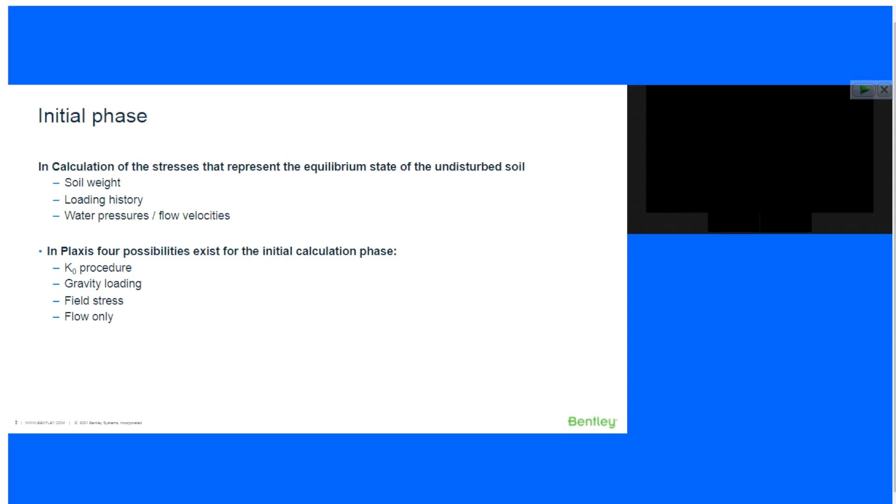I will begin to discuss how the K0 procedure works. So a K0 procedure is a direct calculation of the stresses from the coefficient of lateral earth pressure, also referred to as K0. So the way this works is in the material definitions, we'll need to define an OCR, or pre-consolidation pressure. POP is just an acronym for pre-consolidation pressure.

So what will happen is the program will automatically calculate the vertical total stress based on the unit weight of the soil, which we've defined in the material properties. It'll find the effective stress by subtracting the pore water pressure. From the effective stress, we can find the horizontal stress by multiplying by the K0 value.

PLAXIS by default uses what's called the Jaky equation, which would relate the coefficient of lateral earth pressure in the normally consolidated state equal to 1 minus sine of the friction angle. If the soil is over-consolidated, then the OCR has an effect on the K0 value, and the K0 value will increase as a function of OCR. Then based on that K0 value multiplied by the vertical effective stress, we can get the horizontal effective stress.

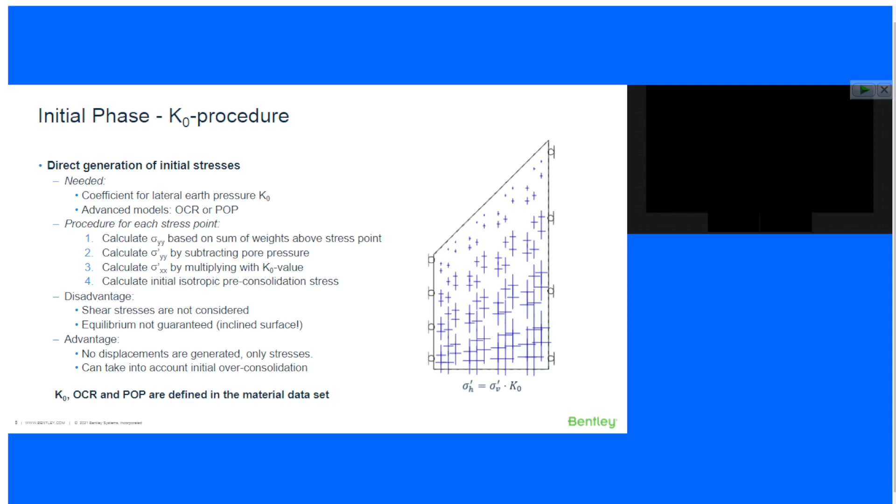So the next option to generate initial stresses is called gravity loading. Gravity loading is a different calculation procedure than K0 loading. How gravity loading works is it makes a direct calculation depending on the unit weight of the soil and the Poisson's ratio of the soil, and develops an initial stress state based on those two factors. So PLAXIS will use the unit weight of the soil and the orientation of the elements generated and generate a stress field based on that.

However, because it's based on the Poisson's ratio and not the OCR or the K0 determined from OCR, the K0 in this case is a function of the Poisson's ratio, specifically Poisson's divided by 1 minus Poisson's. So we'll get a stress field. However, that stress field will be independent of OCR. And because it's independent of OCR, this gravity loading can only really work if we have normally consolidated soil.

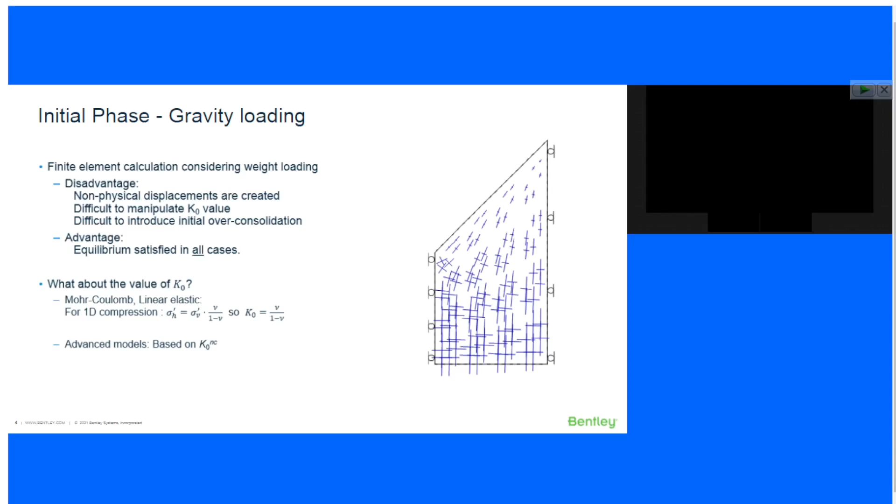Discussing gravity loading further, we need to select the ignore undrained behavior to avoid generation of unrealistic excess pore pressures when we define the gravity loading. And then the program will automatically reset displacements to 0 in phase 1 to discard all the displacements caused by the initial shear stress generation.

So as I mentioned earlier, because the program is making a direct calculation that mobilizes shear stress, it will generate shear strains. And then we need to reset those to 0 when we begin our analysis. So we need to select the option to reset displacements to 0 in the following phase. By default, this is automatically done, so you don't need to do it deliberately.

Gravity loading can take into account steady-state groundwater flow or steady-state thermal flow, and it can include the effect of suction. How suction works is that when you have a soil that has a water content greater than 0 but less than 1, you'll develop capillary stresses in the soil due to the suction effect. And the suction effect would be shown as an effective stress inside the soil. We can activate or deactivate that in the calculation control parameters window.

One final note is that if you're using gravity loading and you have an advanced model that takes into account creep behavior, because creep behavior is a time-dependent behavior, we need to define a time interval, because by default, if you're using a soil such as soft soil creep, everything is normalized to 1 day. So if we would want to have an initial stress state that captures the creep state after 1,000 days, we would need to, in the initial gravity loading phase, set t equal to 1,000 days.

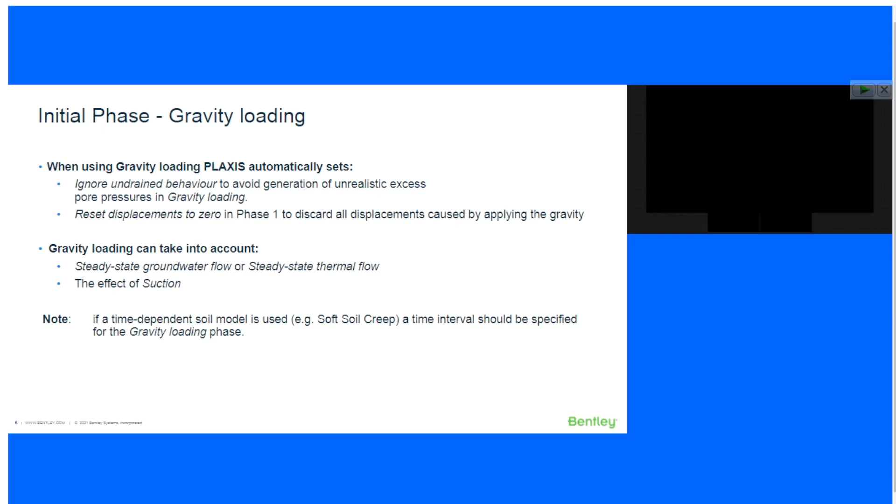The third option we have to define the initial stress state is called field stress. In the previous two options, K0 and gravity loading, the program does an internal calculation to determine the initial stress state. However, with field stress, the difference is that you are fully controlling the initial stress generation in the model. We simply tell the program that in the initial stress state we want each principal direction to have a certain magnitude of stress, and this will be applied all over your model.

So we fix the values, the magnitudes of the principal stress directions, sigma 1, sigma 2, and sigma 3, and they'll be applied over the entire model. No gravity is taken into account, so you're explicitly defining the initial stress state. You're not using the soil weight to determine an initial stress state.

We would typically use this in deep models such as tunnels where it's unrealistic to define the whole profile view of the model. Instead, we would only look at a small section and then apply a field stress that equals what we would expect for the stress state on the tunnel liner.

Again, because we are explicitly defining the magnitude of the initial stress state in the principal directions, we don't necessarily have equilibrium involved. So if your summation of forces in each of the principal directions does not equal 0, it's feasible that, depending on the boundary conditions, you would not have equilibrium guaranteed. In that case, you'll get some kind of error or some result showing that you're not reaching convergence. For the field stress option to work, all your boundaries must be fully fixed.

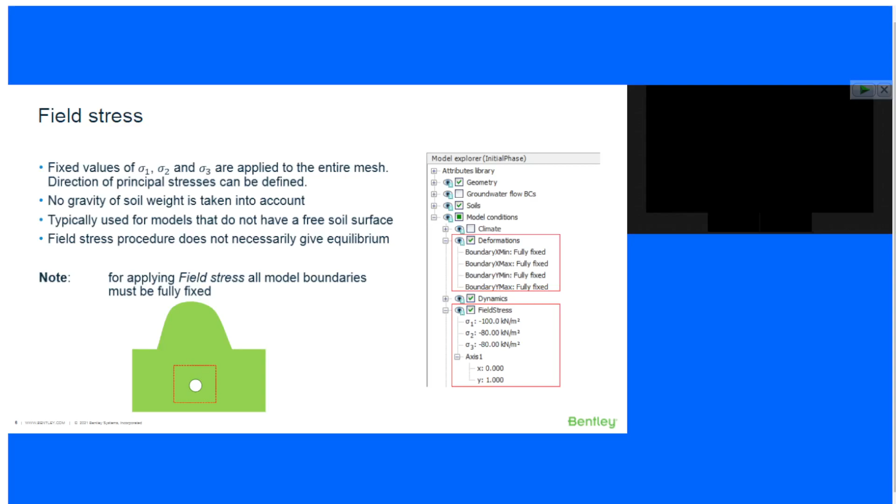So the obvious question now: for most models, we'll be using either the K0 procedure or the gravity loading procedure. Which do you use if you have soils with some level of overconsolidation, so OCR greater than 1, and you have initial shear stresses generated? Shear stresses can be generated from non-horizontal soil layers or from slopes in the surface.

So we have a solution for this. We would define the initial stresses using 2 phases. We would use the K0 procedure, and after that initial phase where we've defined K0 as the calculation type, we would have a following phase defined as plastic loading. We wouldn't make any changes to the geometry, and we would let PLAXIS calculate the shear stresses from the plastic nil step.

So we would have an initial phase with the K0 procedure defined as the calculation. We would define a new phase, phase 1, as a plastic calculation, but no changes would be made in the model. Hence, this is why it's called a nil step or null step. PLAXIS will detect the lack of equilibrium resulting from the K0 procedure and then solve it. This means it will generate the shear stresses inherent in the model.

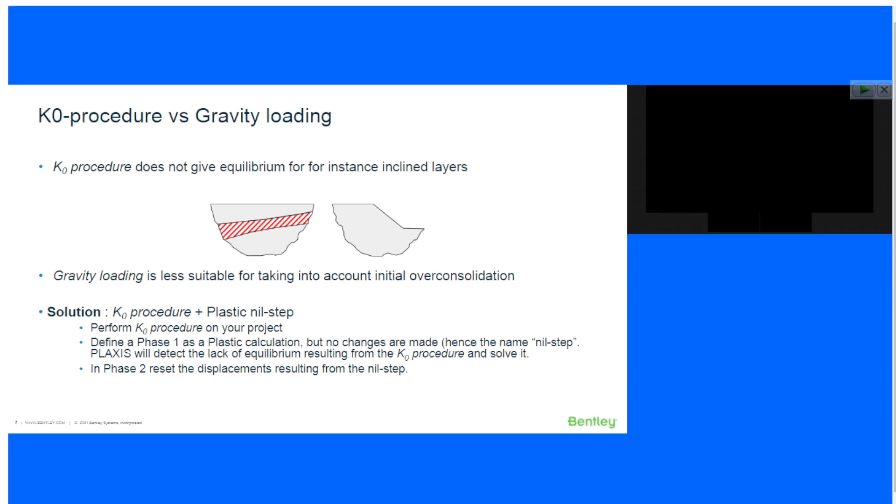And then in the following phase 2, we'll reset the displacements to 0, and then we'll begin to run our analysis. This will generate the correct initial stresses. I have a handy illustration that captures this concept in the following slide.

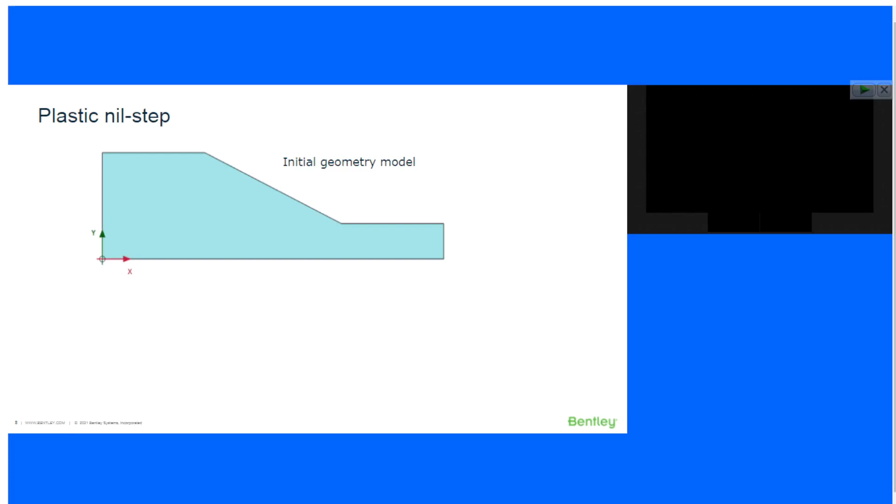Suppose we had a soil here with an OCR value of 3, so we'll have to use K0 as the initial phase. This is the initial model geometry. PLAXIS will do a K0 calculation and determine the principal stresses and their magnitudes. You can see here they're illustrated as these red crosses inside the soil element. These would be the initial stresses from the K0 procedure.

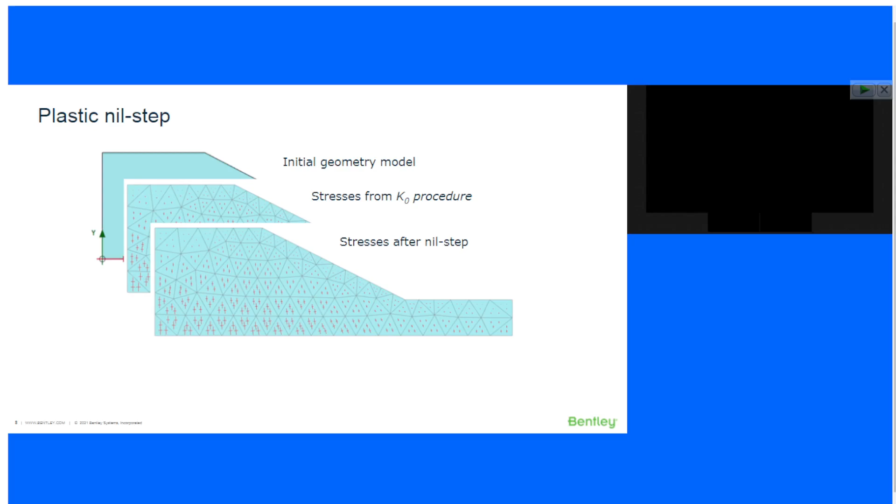From the plastic nil step, it will incorporate the shear stress generated from the slope, and then we'll get a change in the orientation of the principal directions. From the stresses after the nil step, we'll mobilize displacements, and then we need to reset those displacements to 0 once we begin phase 2.

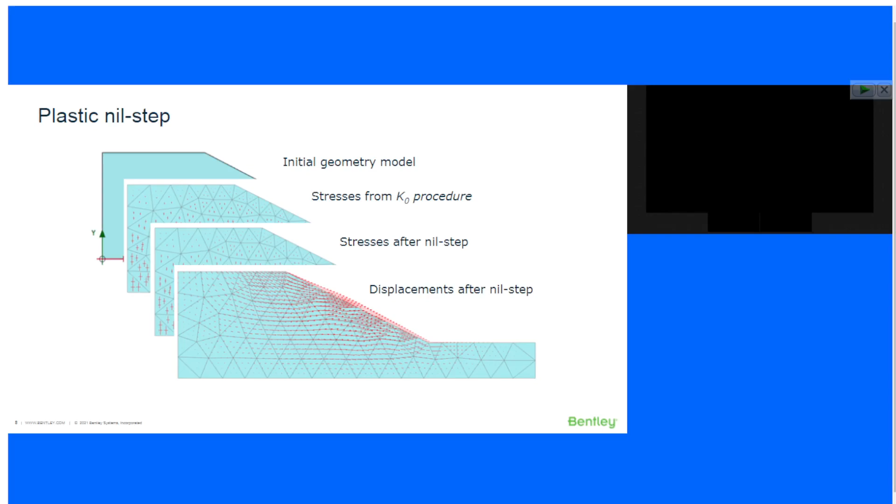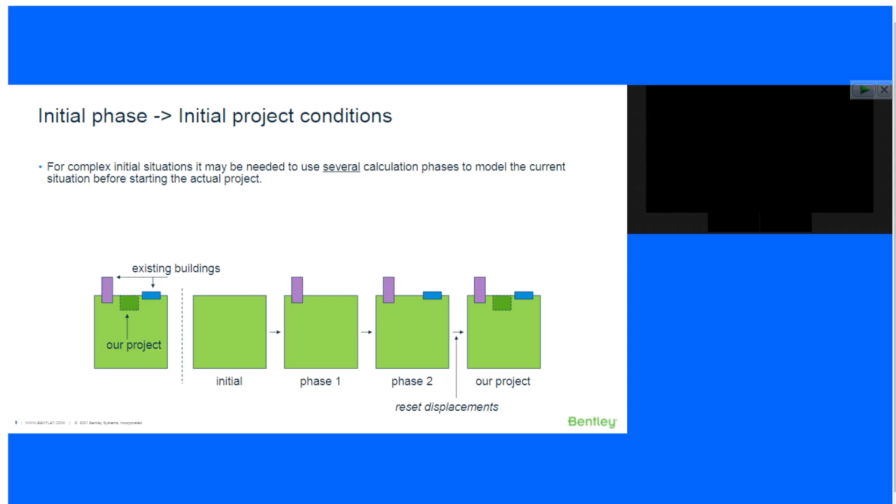This is important to illustrate that sometimes multiple phases will be needed to capture the stress history of the soil, because the stress history incorporates many different factors that may exist at the site prior to our construction. To do that, we'll need several calculation phases.

So some important notes here. To generate the correct initial stresses, we need to capture the correct initial project conditions. So we'll need to apply loads in the same chronological order as was done in reality to capture the correct stress state. If we're working with undrained soils, we need to define the soil as an undrained soil.

And if we have past consolidation behavior, we'll need to run a consolidation analysis. This is especially important in cases where we have soils with the tendency to show creep behavior. So if we're using soft soil creep, for example, we will need to specify some time interval for the consolidation process to run. Because creep is a time-dependent behavior, we need to define a construction time, and this will determine the magnitude of the creep that will be present in the soil.

And then after we've defined the phases that capture the initial stress state, we need to remember to reset displacements to 0, because we need to set a datum for our project to run. So reset displacements to 0 once we begin our analysis after the phases that define the initial stresses.

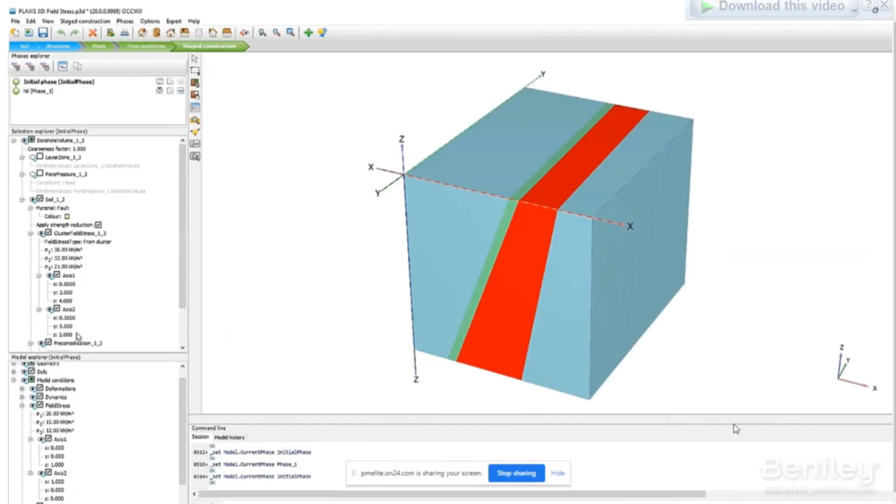this is at our Bentley Communities website link. It shows that you can generate field stresses using the principal stress directions as mentioned by Sean. So you can create different soil clusters depending on the strata that you have and assign the stresses in the principal directions as shown. And then you can also view the stresses, whether they have been generated correctly or not, by going to the stresses menu and checking the principal effective stresses.

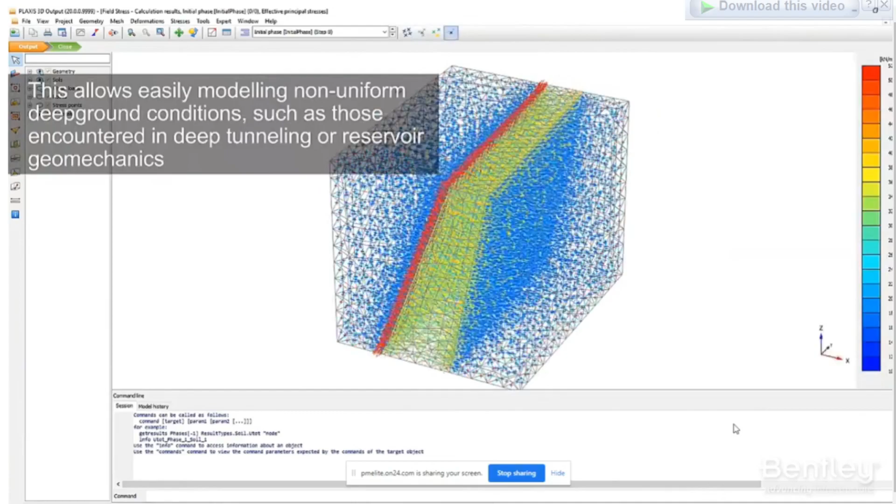Here you can see that the stresses are not varying uniformly. They are discontinuously varying as specified in the input. So it's a very interesting feature. When you have a very complicated geometry, you can use that.

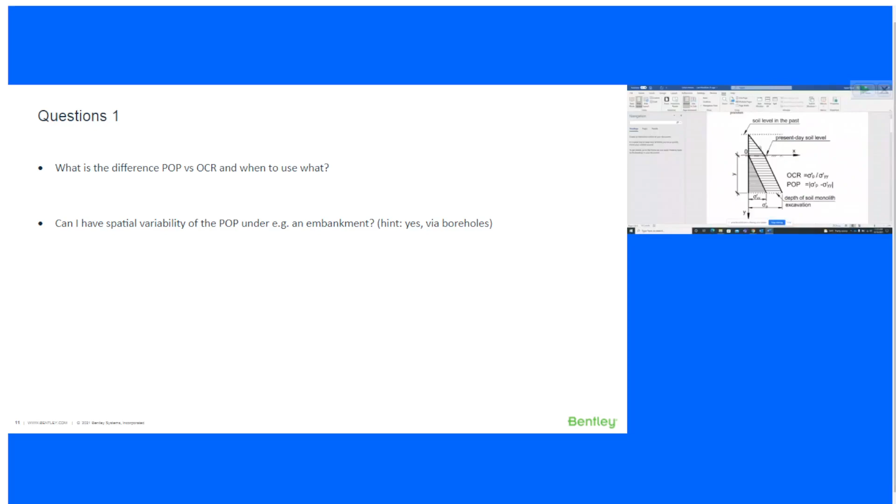All right, so first question. Difference between POP and OCR. So POP is the past overburden pressure and OCR is the overconsolidation ratio. Here again, I have a nice visual to show. So for example, this is the top level, which shows the soil level in the past, and now the present day level is here. So in that case, you will have an overconsolidated soil.

And so the overconsolidation ratio is determined by sigma P, which is the past maximum pressure, over sigma YY, which is the current vertical pressure. Whereas the POP, which is the past overburden pressure, is determined by subtracting the current vertical pressure from the past pressure. So this way, you can see there is a slight bend in the stresses, and so there's a shift in the vertical stresses because of the overconsolidation ratio.

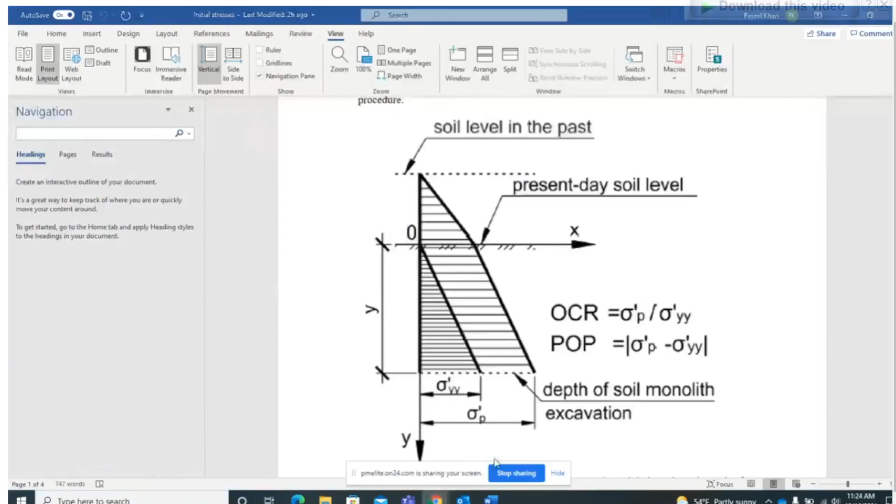And so what are these? If the soil is overconsolidated, there needs to be an adjustment in the coefficient of earth pressure K0, which can be done using the OCR or the POP. POP, which is the past overburden pressure, is more preferable than the OCR since it describes the deformability process more accurately.

Also to note here is that if you specify a very low K0 value using the K0 procedure, it can lead to stresses which may violate the Mohr-Coulomb failure criterion. And so PLAXIS will automatically reduce the lateral stresses such that the failure condition is satisfied. So the stress points will be in the plastic state, and you can see those in the output.

This will result in a stress field which is not in equilibrium. So it is generally preferred to generate an initial stress field that does not contain Mohr-Coulomb plastic points.

Also, you can use the K0 procedure followed by a plastic nil step. This way you can account for the OCR of the soil and the slope layers. Once you generate the initial stresses using the K0 procedure, it will not have generated the shear stresses as mentioned earlier, and your model will not be in equilibrium. So you will have to introduce a plastic nil step.

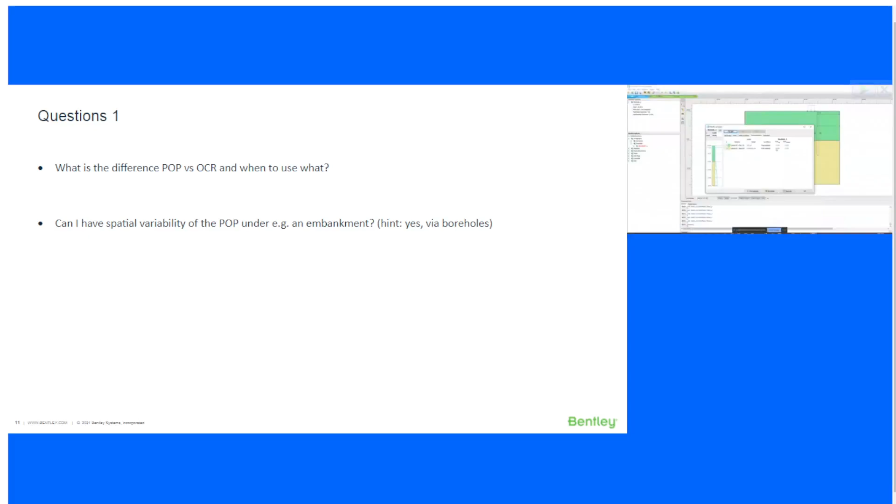Okay, so another common question we get over at PLAXIS is a user has asked in the past, can I have spatial variability of the pre-consolidation pressure under an embankment? And we have a hint, so the answer is yes. I will show you where that option exists. So I'm going to share my screen right now. Let's see. And then I'm going to open a PLAXIS window here. Okay, so we got a PLAXIS window here.

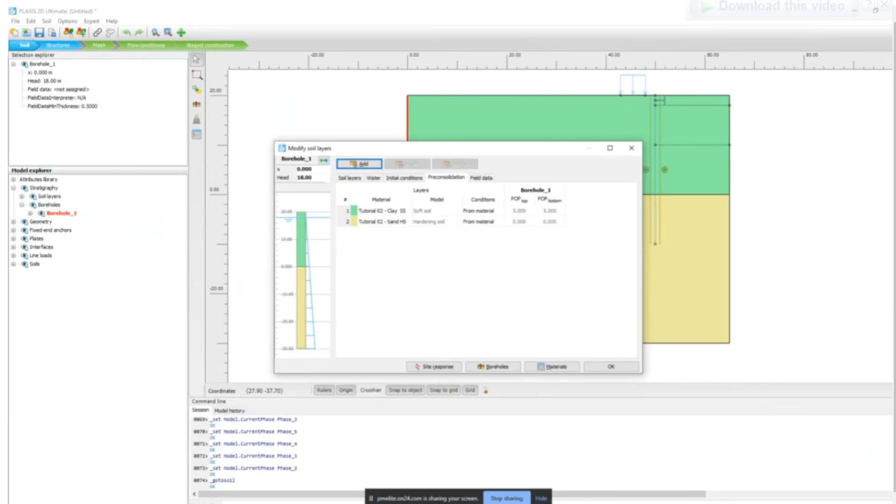If I go from the borehole window, from soil layers to the pre-consolidation tab, I can manually input the past overburden pressure or pre-consolidation pressure in these cells here. So we can define the stress history using boreholes rather than defining it in the materials window. So that's an option we have. And you would find that under the pre-consolidation tab in the borehole menu. Okay.

So Fasil, I'll pass off the next question to you. Sure. What is the influence of the over-consolidation ratio on the structural forces? So suppose you have a plate, or you have some embedded beam, or some structural element inside your PLAXIS model. How would the OCR affect the structural forces that PLAXIS reports?

Yes, so the OCR, which is overconsolidation, mainly affects the stress-strain behavior of the soil. So therefore, any soil-structure interaction will be affected accordingly. So for example, if you have a retaining wall and you have an overconsolidated soil, the at-rest and passive earth pressures will increase on the retaining wall compared to a normally consolidated soil. Also, if you have an overconsolidated soil, you will have lesser vertical settlements. And so if you have a concrete slab, which is modeled as a plate or a soil volume, it will deform less vertically.

And also, especially when you are doing time-sensitive analyses, such as a dynamic analysis or a consolidation, you will have a delayed deformation response because the soil is overconsolidated. It will have a little stiffer behavior. So your structure will also output a delayed deformation behavior.

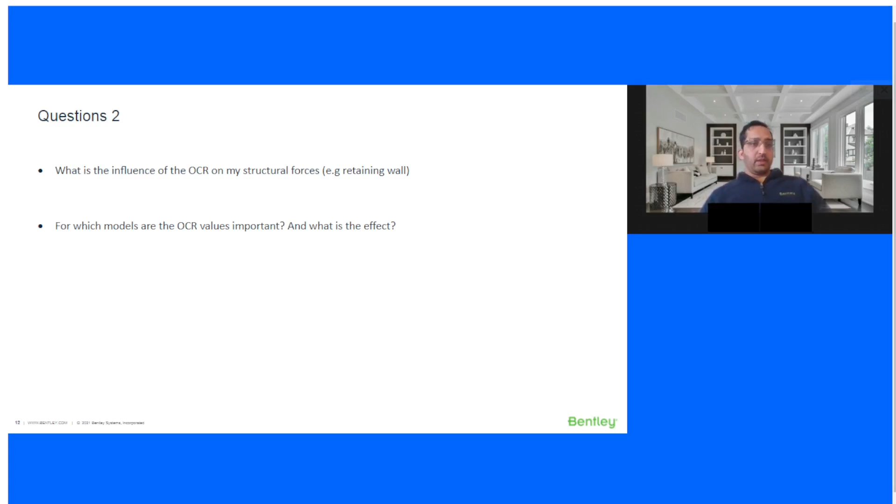Thank you, Fasil. I would also like to add, we have a lot of good literature, not just about the material models, but also case histories and publications on our communities website. If you go to Bentley Communities and search, for example, hardening soil or soft soil creep, it'll pull up a list of publications we've done and background literature on that search topic, as well as the material models manual as a good resource to understand how different soil inputs affect the soil behavior.

I would also like to add to what Fasil has already said, that when we have simple soil models like linear elastic or Mohr-Coulomb, OCR will only have an effect on K0. So it will only have an effect on the lateral coefficient of earth pressure, K0. So that's for simple models.

For advanced models, it could have influence on the yield function of the soil. If we're working with critical state soil mechanics, it's going to influence the plastic potential function. If we're looking at soils that have creep behavior built in, it's going to influence the creep rate. Creep rate, how fast the soil creeps, it's a long equation, but it's a function of the OCR. You can imagine that soft, normally consolidated soils will creep at a faster rate than a stiff, very overconsolidated soil, and that's incorporated into the model itself.

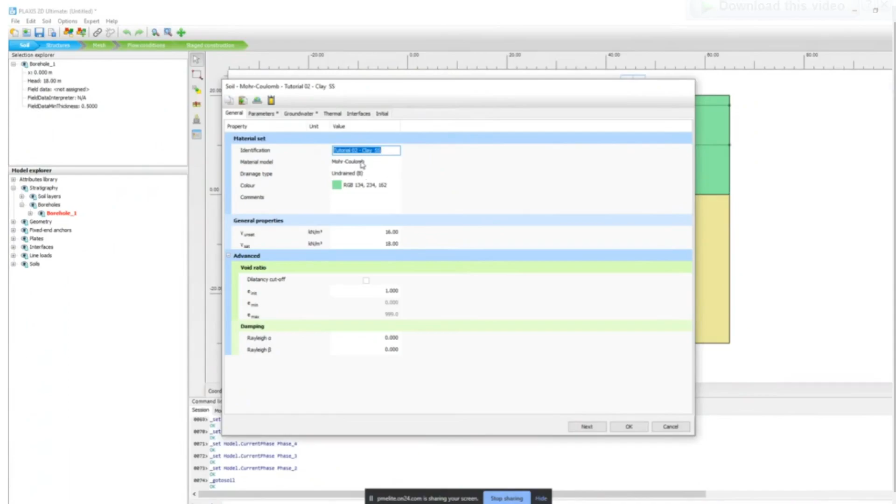I can share my screen here to show that. Okay, so here I've defined a hypothetical soil model using Mohr-Coulomb and undrained B. From there, I will set the K0 determination equal to manual, and then I will need to manually input my K0. So this would be the case for undrained B. Indeed, it is true that using undrained B, the friction angle would be equal to 0 because the shear strength of the soil is constant over all stress paths.